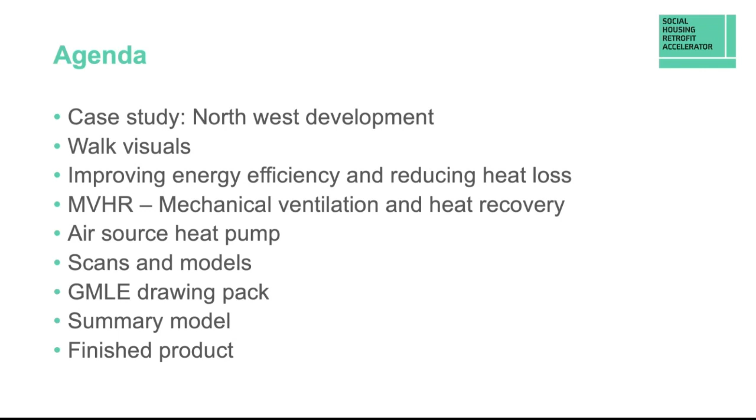Talk about the drawing pack and the information we produced and how we're now tailoring that to contractor needs. And then we'll just sum up with the finished product. And I think talk about next steps because we're still dealing with this particular property typology.

So this development is up in the Northwest, it's up in Manchester, and is part of a large estate. It came about through a conversation with the asset director at the RP about 3 or 4 years ago, and we were talking about different system build properties. Now, those of you who work with system built properties and also work with the wonderful RDSAP that generates EPCs will know that RDSAP treats all system built properties the same. And therein lies the challenge. They're not all the same.

BRE have identified about 450 different types of system built property, from the early 50s and before, right up until the late 70s. And they all have different building physics properties, and so we need to take a much deeper dig than SAP encourages us to. This project was a large estate built in 1970.

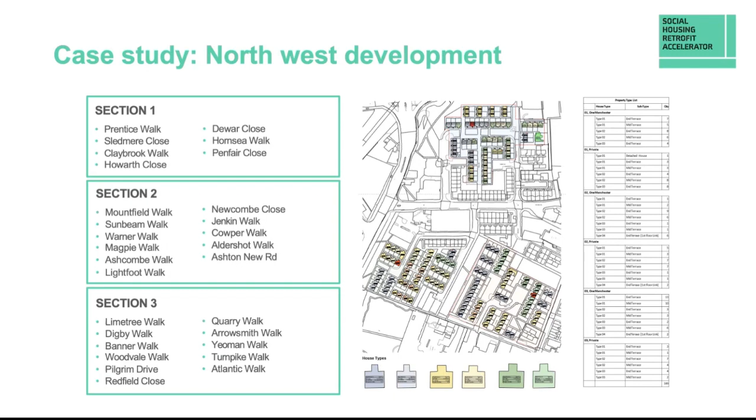About 40% of the overall estate was addressed by this project, but it began by just a conversation about how do we deal with these leaky concrete properties? That was the question asked to me. And my response was, are we talking about no fines concrete? For those of you who've come across no fines concrete properties, they are what they say.

They're made from in situ cast concrete, cast in molds, very quickly, very rapidly built. And the concrete is basically missing the sand. So no fines means there are no fine particles. So it's in effect an in situ gravel wall solidified by a cement slurry with lots of connected voids. And the challenge that gives us is that these properties are super leaky from an air leakage point of view.

They were decanted from Victorian back-to-back terrace estates, and then we've had a lot of long-term residents, and the houses are quite well loved in so much as they have really great space standards, and the layouts were good and they were pretty well designed. The problem being, it doesn't matter how much the central heating's on, the properties go cold as soon as the central heating's turned off. And that's because of the building physics of no-fines concrete houses.

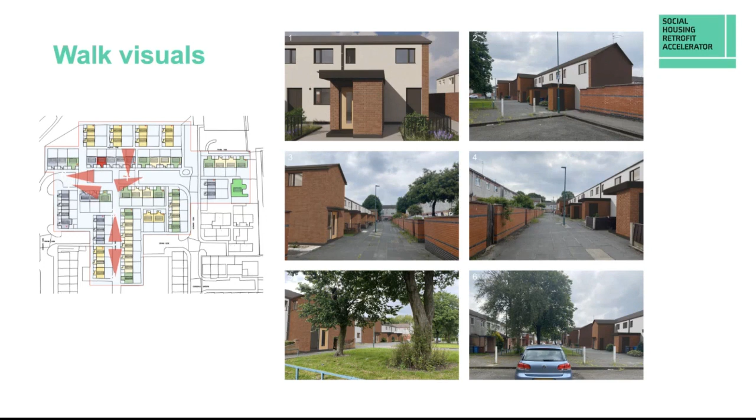So what did we do? On the Antrim properties, it took us until the 5th one to really learn about the detailing in and around the eaves and the openings and the window installations, and the suspended floor, first floor, and also how the roof space worked, before we could get the air leakage rate down to where we wanted it to be. We managed to reduce that to, on the best property, around about 6, which was fantastic. Our target ultimately was 8.

But then we took our knowledge to a second project. This was funded through National Energy Action. We started that in 2018. For us, we thought it was a massive scale up, 35 properties in Halton, in Merseyside. And we heavily monitored the work on these properties to make sure the air tightness was where we wanted it to be.

And we installed HOBO data loggers. So we manually installed the data loggers and collected them at the end of the project after a couple of heating seasons. And we logged the temperature and relative humidity in the properties. The documents from that are available if anybody's interested. But we managed to improve on our work in Antrim, really stabilize the temperature in the properties.

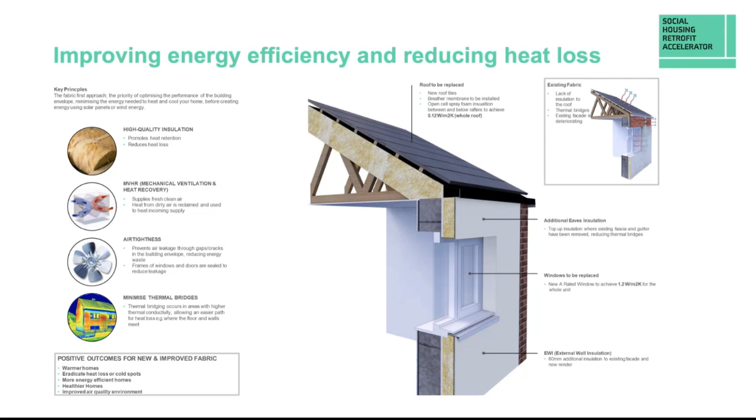That allows us, of course, then to insulate at rafter level, which means we have quite a nice wrapped internal space that's then ventilated by the MVHR, which is air filtered. And of course, we put as much insulation as we possibly could into these spaces. And we did some modelling around insulating at rafter and joist level to see whether we were generating any condensation in the loft space. And that led to some principles that we've developed that we use in non-no fines properties as well.

On a later project in Manchester, we weren't able to install the MVHR system for a number of pragmatic reasons. The Halton project was originally heated by a warm air system, which had long since been removed, but the ductwork and runs were still there, and risers, which allowed us to really easily bring some new ductwork through from the loft space. But in Manchester, we didn't have that luxury.

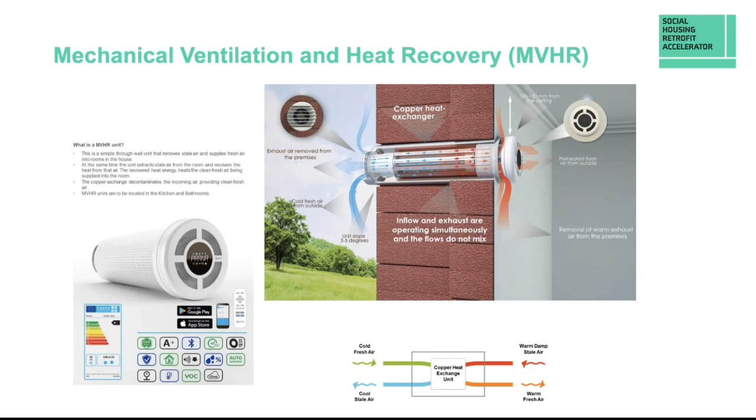But we found quite a decent direct MVHR unit with the heat exchanger within the unit, and we simply expanded the apertures from the existing bathroom and kitchen vents and installed this unit. I'd like to find a slimmer one that would fit into a 110mm existing opening, but I haven't done yet. These are 150mm diameter, but they work particularly well on this project. And we moved to air source heat pumps in Halton on 30% of the properties, and in Manchester, I think on 70% of the properties.

Again, there's a takeaway here. The original properties had hot water cylinders, which were subsequently removed when combi boilers were fitted over the last 20 years. And people do reappropriate space. If you have a cupboard that used to have a tank in it, it rapidly becomes storage for something else. And residents aren't always keen to lose that storage.

For the properties that we insulated at rafter level, we were quite happy to put the tanks up in the loft and just work with the asset and maintenance team of clients to figure out how those tanks would be maintained. There's a piece of work that went alongside this on customer engagement on heat pumps.

Yes, and that piece of work was about behavioural change, and that encompassed the work we were doing to insulate the properties, how the fabric of the properties became heat stores, and how those heat pumps would favour a lower temperature radiator system and would run not continuously, but for longer periods at lower temperatures, rather than the quick hit of a high temperature radiator system running from a gas boiler.

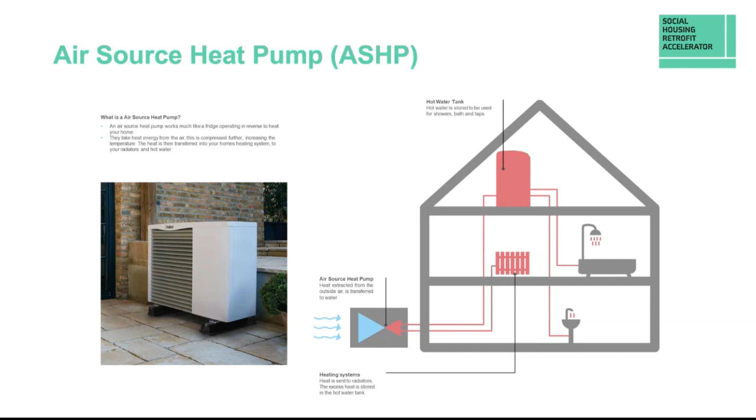Current feedback is that the air source heat pumps are costing no more than the gas boilers. We are looking in all of our no-fines schemes at augmenting air source heat pumps with PV arrays, which means that some of the electricity is generated on site, and that's further going to reduce the electricity bill. We think that'll tip the balance between the cost of gas versus electricity on these systems.

So to run through the methodology, these aren't no-fines for the experienced system build people there. This is a scan we did of some cross walls, but it's a useful scan just to illustrate what we can do from street side. So we're using a point cloud scanner, handheld, limited intervention to the residents, really rapid. We can pick up accurate dimensions of the properties.

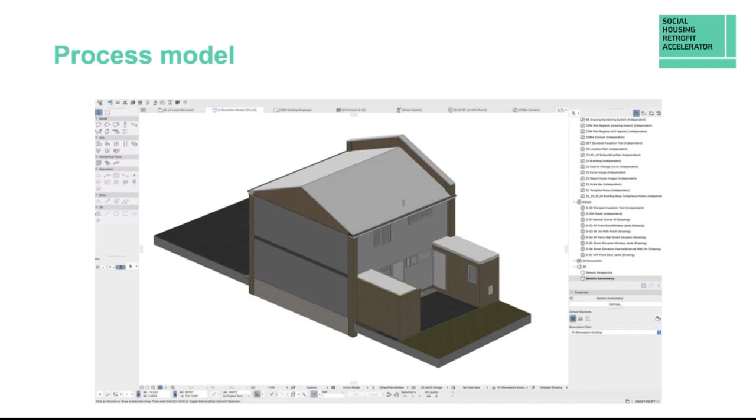And from this, we make a process model. So we're using some software called ArchiCAD, which in some ways is similar to Revit, but it has some really nice inbuilt energy modeling potential. So we model these quite quickly from the point cloud, and we use this as the basis for all of the information we produce. It allows us then to do some thermal modeling.

So this is a test of window positions in no-fines housing. We do this live, so we can move the window around and find out where the sweet spot for position is. The image on the left was the existing condition, and you can see the white line, which is against the blue, is actually the dew point, the point at which condensation occurs. And in the current position, it's right up against the windowsill and the dry lining.

When we add the external wall insulation, you can see that we push that condensation line out right outside the concrete. And to design this, we moved the window until that blue-white line was outside the existing building fabric, so that we could be sure that that concrete was going to act as a heat store and not be trying to resist damp.

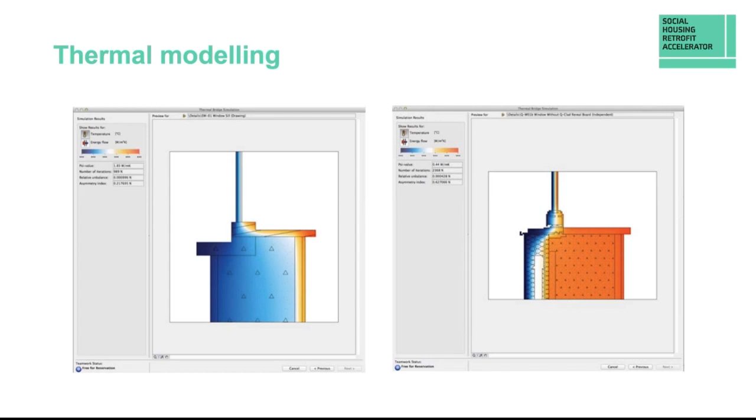So modeling some of these, we use all sorts of thermal modeling software. The modeling you saw on the previous slide is Eco Designer within the ArchiCAD suite. We also use THERM and PHPP depending on the project. We're obliged to provide data in EPC format as part of our projects. It's a system, whether we like it or not, that is there nationally, and it's how we compare one property to another. So we like our SAP modelling to be as accurate as possible.

Like a lot of others, we might start modelling in RdSAP, but we export our RdSAP into on-construction SAP, and that allows us to much more finely model cold bridging, window performance, and any of the technologies that we put in.

One of the things about RdSAP that's worth mentioning is you can see in the bottom left image, the wall type is system build, and that will trigger a whole series of variables to be filled, regardless of whether your property is no-fines concrete or BISF steel frame, or cross wall and timber frame. So we like to expand on that and get much more detail in. But you can see from the top left, the starting point was an E52.

Through the non-renewable work, so fabric only, we got these properties up to a C78, and we reduced the heating load from over 200 kilowatt hours per meter squared per annum to just under 50, which was what was called for in the demonstrator phase.

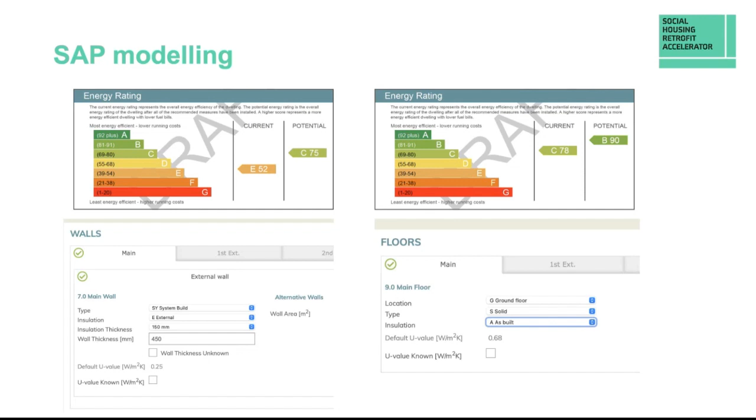Going forward, with the introduction of renewables, particularly with PV, we were getting to a level of above 90. This modelling doesn't take into account the fact that we've turned some leaky concrete into a nice solid heat store. So I would expect the actual performance, if modelled and measured properly, would be pushing 100 once the PV is installed.

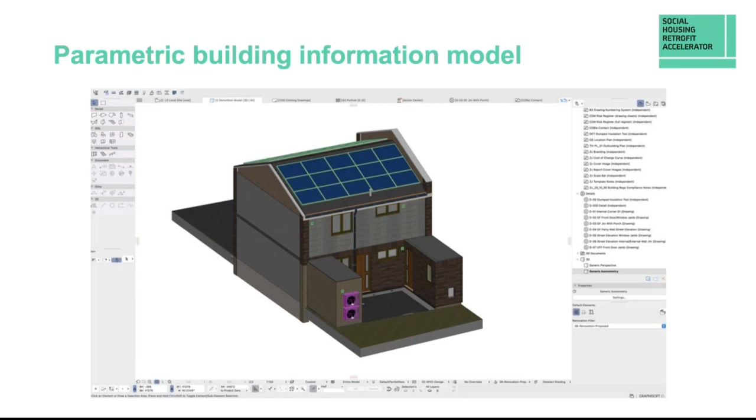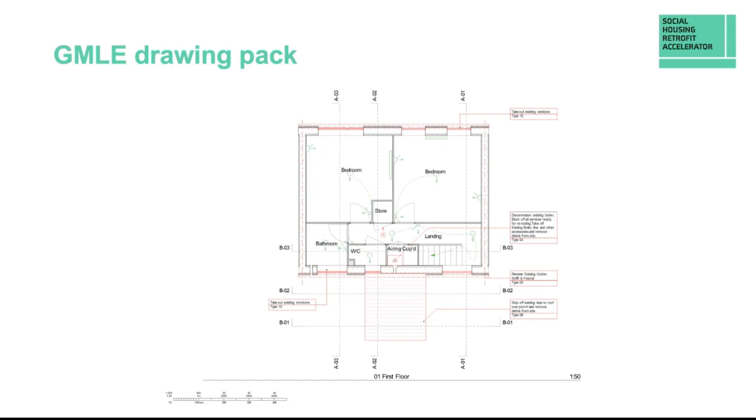Here's the first floor, and you can see where the existing boiler is and where we're removing that, liberating some space that can then either take a tank or become some storage space. And the notes are parametric as well, so they're generated from the library items that we put onto these models.

We like to cover all the enabling works. For those of you who are delivering retrofit schemes, you'll know the first time you do it, you cost up your EWI and cost up the PV and cost up various interventions, and then you find the cost doubles because of all the enabling works like extending eaves, repairs, finding out that when you take your windows out on no fines, for example, the apertures are not only not rectilinear, but they're not perpendicular from front to back either, because the whole thing was cast in molds, and having to deal with that work.

In fact, we're working on some no fines at the moment in Wolverhampton, and it's always good to be on the ground talking to your residents. We found from one resident who's been in his property for 50 years that our window replacement this time around would be his fifth set of windows. So if you imagine that windows have been fixed 4 times previously into some non-reinforced aerated concrete, you can imagine the kind of issues we find when we take the windows out and what's been covered up in the past and what needs to be rebuilt.

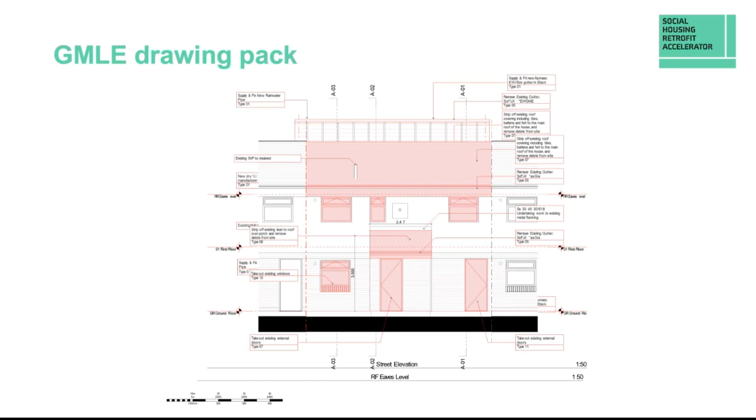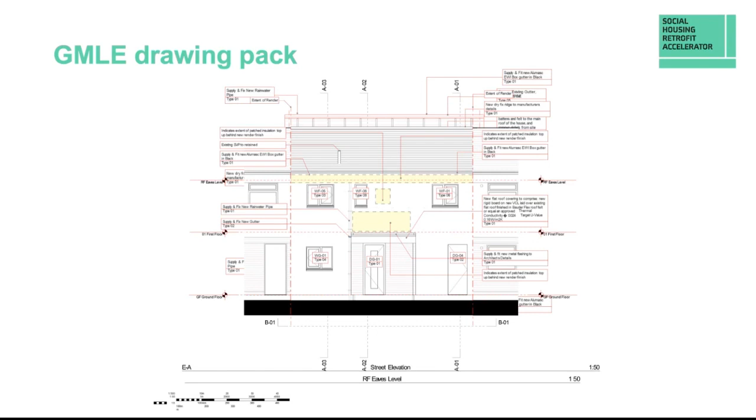So on our next project, we're going to design some cassettes, insulated cassettes that will fit into these window openings and receive a more standardized window. So we are still learning as we go. We're on No Fines project number 5 now. Final set of drawings has all the site notes that are needed, plus quantities, plus references to a detail pack.

And we like to produce a summary model. So one of the benefits of modeling all these things in 3D is we can produce a cutaway model that we use for engagement, whether that's internal in our office or with our contractors or with the registered providers, or most importantly with the tenants, where we can explain exactly what's happening to a property, why it's happening and what the outcome is going to be.

And we found that engagement actually is really useful in fomenting the behavioural change that's needed when a resident goes from living in a historically leaky property, where you might spend your evenings in one room trying to stay warm, to a house with a homogeneous temperature and stored heat within the walls that actually act as low temperature radiators in themselves.

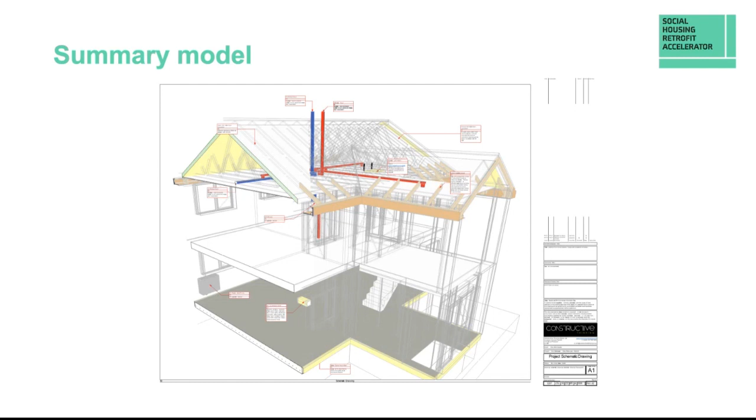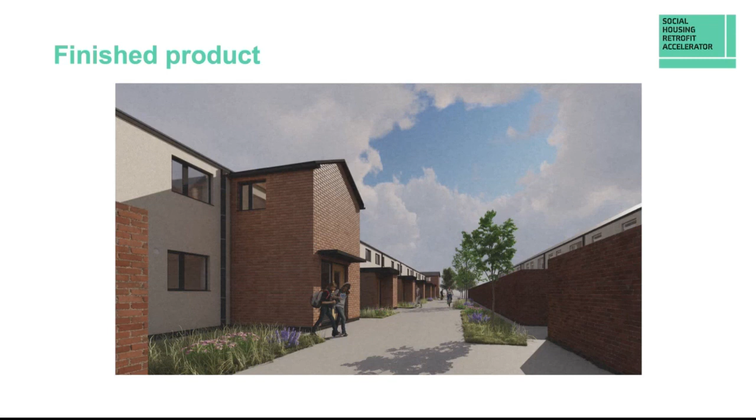We are dealing with properties that have architectural merit, and the finished product shouldn't just deliver better building performance, but also it is part of a wider public realm and has a place in that. So I've probably only touched on 30% of all the thinking that went behind those projects.